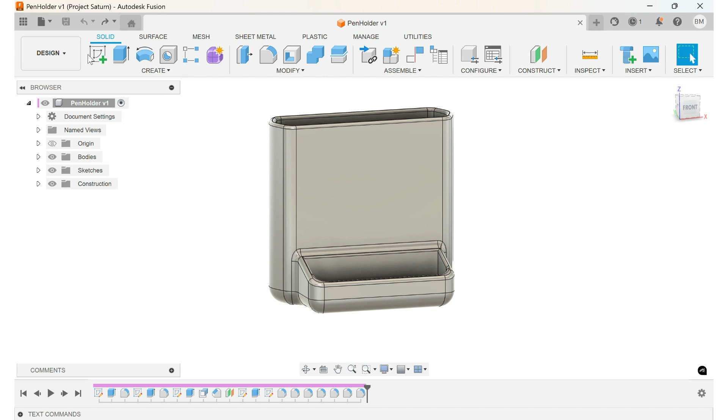So I opened a random part that I was working with, and I want to put a logo in here. First, so I can center up the logo, I'm going to find out where I want to put it.

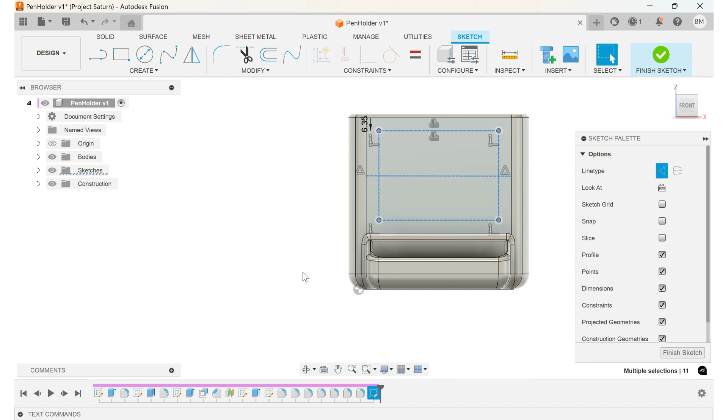So I'm going to make center marks and then offset this negative 6.35, and then turn that and that into construction lines so it doesn't mess up with my extrusion later.

And then to make something an SVG, I'm going to grab this logo, save image as, and put that in my downloads folder. And then we'll go to this one, save image as, downloads folder.

I just typed in free AI vectorize image, and I got this one, which is right here. So I'm just going to do this again.

Upload - might as well do both of them at the same time. Download that one and download that one. And then insert SVG.

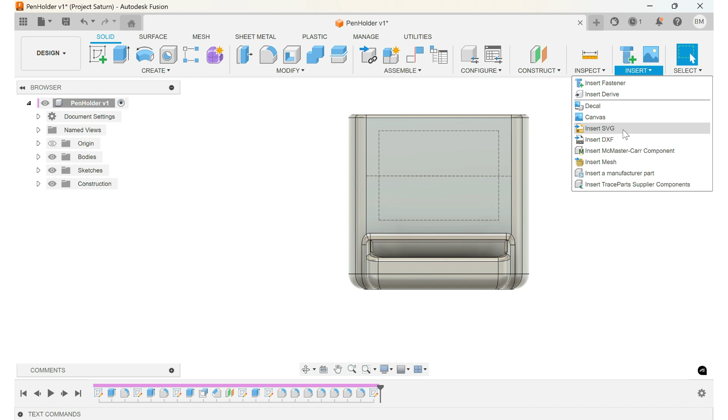Just grab that logo, you're going to want to put it on that face. So it's that right there, and that's a sketch plane. Then I just click the face I want it on.

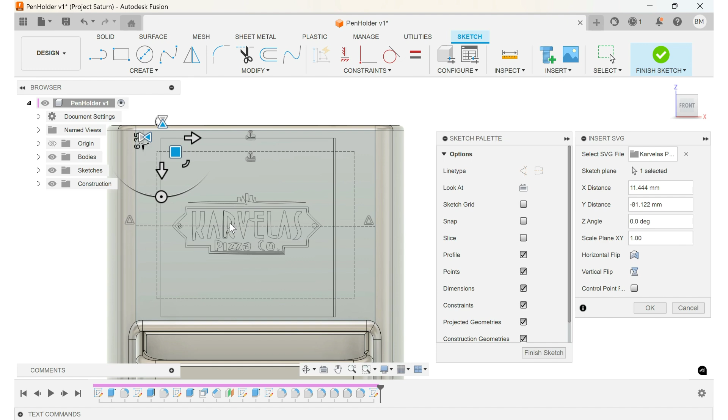Okay, so this one didn't end up great. But you can also default to this website - let's go there and open it and convert to SVG.

This is the main website. Just not liking that one a lot. That one's a bit better.

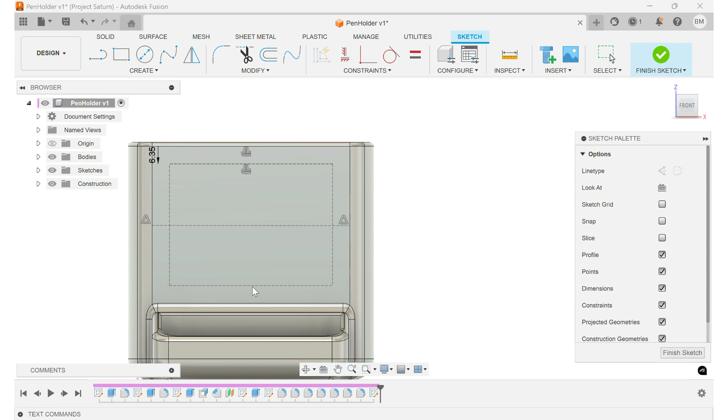So now insert SVG, whatever that most recent one is, and scale that down.

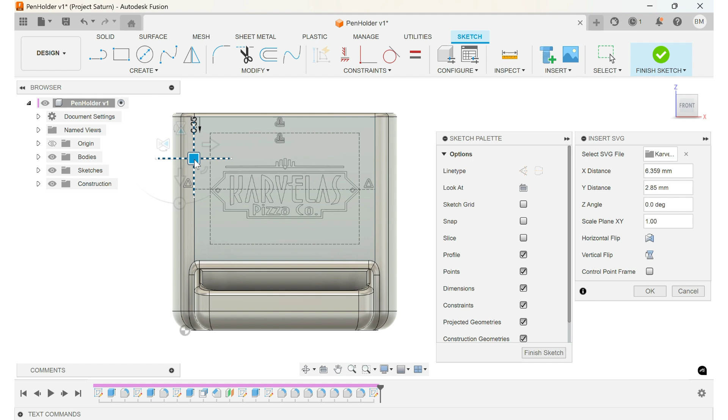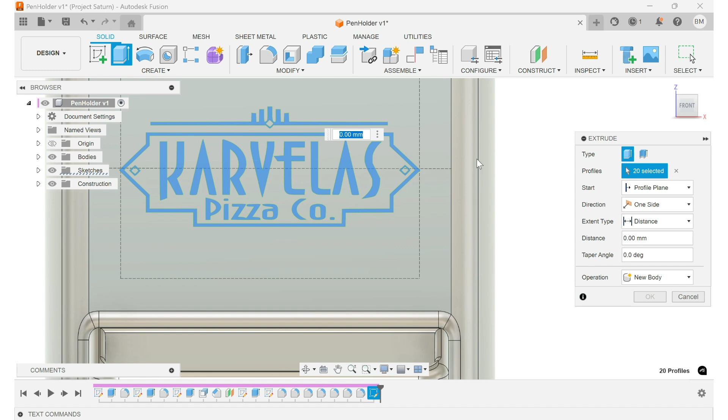And then just put it on that center line. I'll just highlight that and get rid of the ones I don't want because that's easier. And that looks pretty good. So negative 0.5.

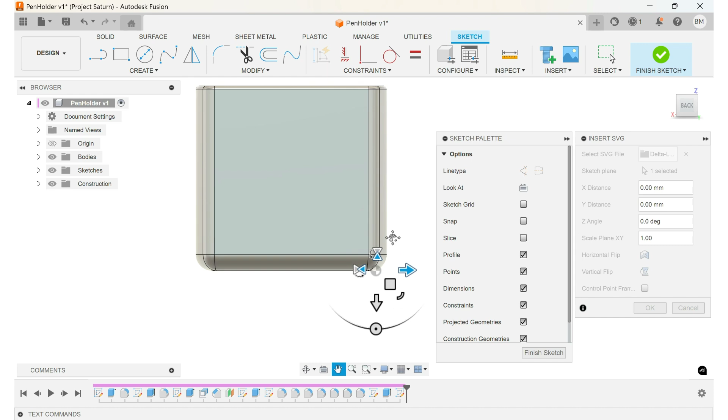And the other one I want to show is the delta, because it has two colors that are close to each other and no break line. So take that and then just select that surface, scale it down to where you want it.

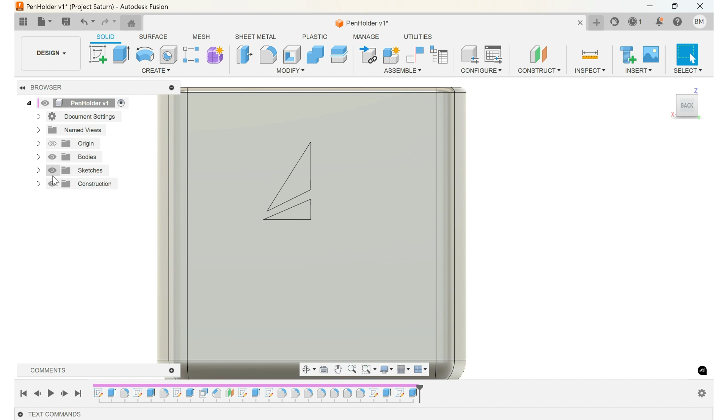And just hit OK on that. And then what you can do is negative 0.25, and then go back into that sketch and extrude negative 0.5.

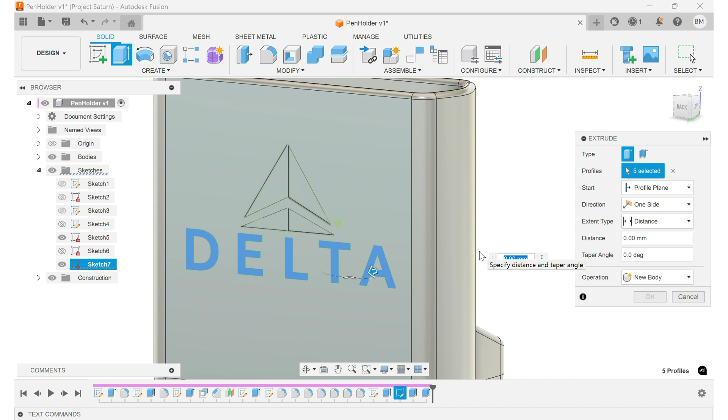And now if you turn off the sketch, you can see the difference in the height. So that's where the two parts are, and then you can go back here and do the rest of the word. If you want to make it contrast more, you can go 0.5 out that way.

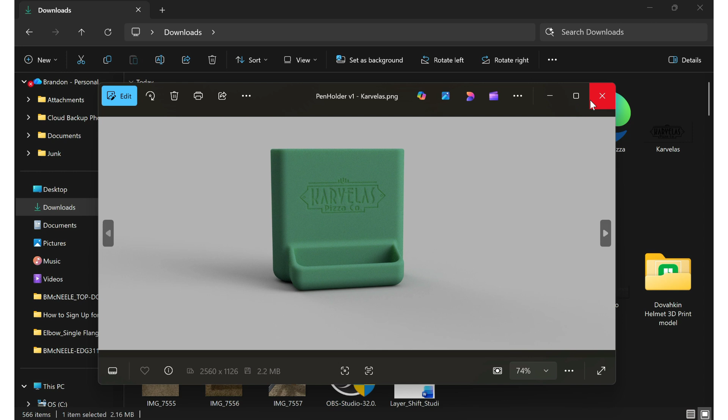So it's a little hard to see outside the rendering environment, but I had to take a picture of rendering it out because it won't work. But that's the front, and it just took too long to do the back. But that's how you use an SVG on here.